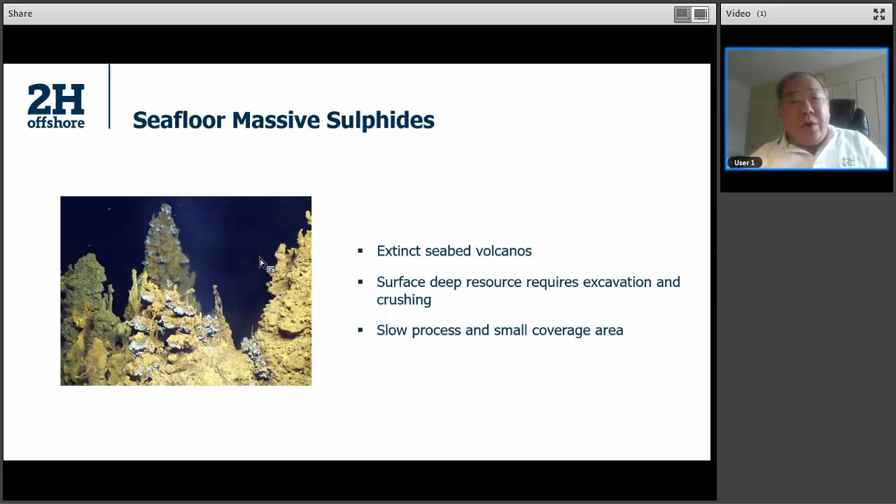Right, where are these resources? They're all over the world if you care to look. Some in exclusive economic zones, EEZ. These are the areas 200 nautical miles from shore where a country has exclusive rights for exploiting the resources. But the majority is in international waters outside the exclusive economic zones, because nearly 2/3 of the world is covered in ocean, and only a very small part of it is close to shore. The rest is in international waters.

Now, there's an organization called the International Seabed Authority, ISA. It's a United Nations organization that is headquartered in Jamaica. It regulates and manages the mineral resources in the international waters.

So I want to briefly talk about examples of resources in EEZ. And this is quite a well-known example in Papua New Guinea. What they are mining are SMS, the extinct volcanoes. The first commercial attempt of deep sea mining by Nautilus Minerals, a Canadian company, but they're based in Brisbane, Australia. But the project is now suspended because of lack of investments, running out of funds to get to the

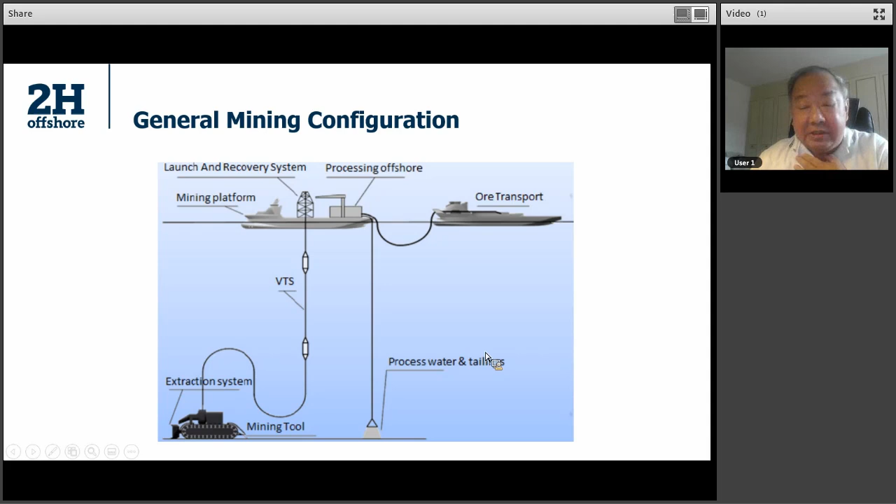Okay, I will talk briefly about each major component. First one is the production vessel. This is the Nautilus example. It's got quite a number of A-frames, you can see here, and a tower for deploying the riser. The A-frames are to deploy the miners, the crawlers, to the seabed.

Now, the number one challenge of the production vessel is dewatering of the slurry. The slurry typically consists of 85 to 90% water, 10 to 15% solid ore. So it's a lot of water. And this is water from the seabed, which is colder and has a different chemical composition, and you can't just dump it overboard, as I said. So you need wastewater disposal, to get rid of it safely, cleanly. And you have to store the dewatered ore, which is still moist, and then transfer this ore to the vessel that goes back to shore.

Now, the vessel designer tells me that when the ore is wet and stored, digging it back up to transfer to the transport vessel is as challenging as bringing it up from the seabed, because when it consolidates, it's difficult to dig back up. And the easiest way to transfer something is to have it mixed with water, because solids don't flow easily. Now you've just got rid of the water, and you've got to put the water back. It's a bit of a contradiction, so it's a bit of a headache.

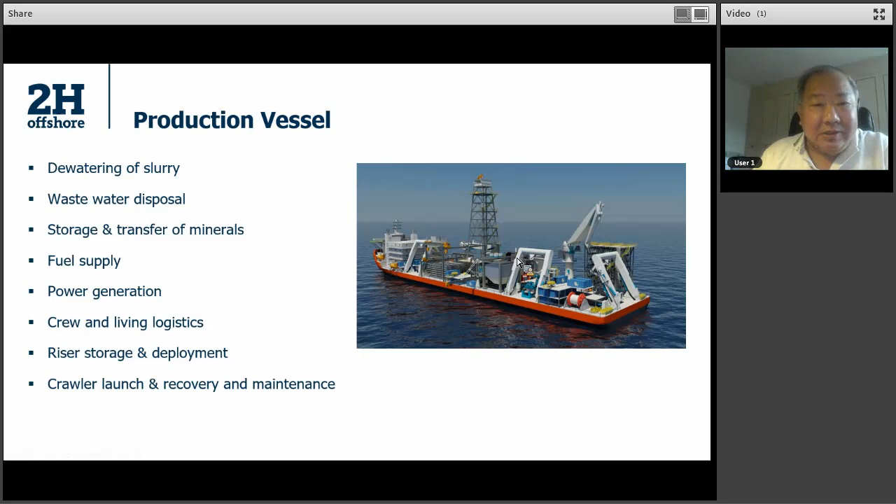Crawler. The crawler technology is adapted from seabed dredging and trenching. This is an example of the Nautilus crawlers, the three of them, because in Nautilus they are mining SMS, the seabed volcano. It needs a lot of digging and crushing and sorting out before the ore is mixed with water to send up the riser.

And now being so deep, Nautilus is about 1,500 to 2,000 meter water depth, and it has very high external hydrostatic pressure, which the components of this crawler have to withstand. They have to be launched and recovered for maintenance at quite regular intervals, and they have to move around the seabed in a pattern very efficiently, leaving no stone unturned, so to speak, to get the most out of the seabed.

Power consumption, as you can see, is massive and will require a lot of power to keep it going. Maintenance: every few weeks or less, you will have to bring each of them up, making sure that the parts are still functioning efficiently.

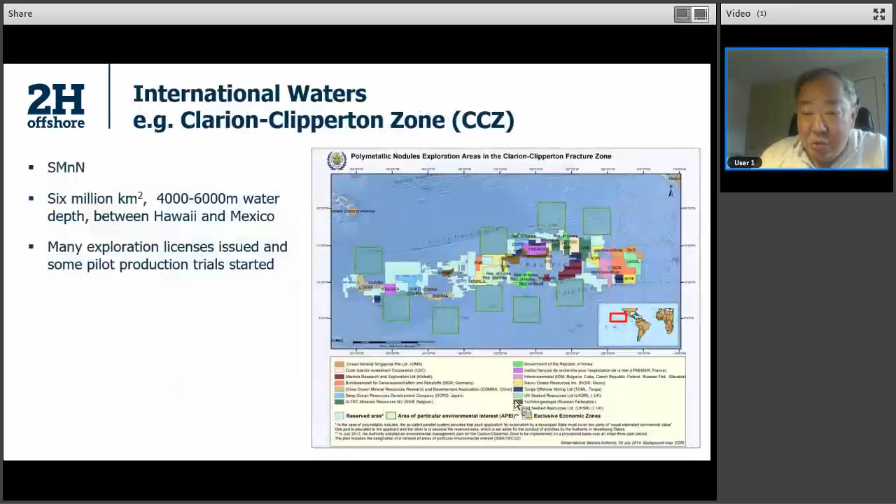Cable umbilical management. You can see in the last picture that the crawlers are all working simultaneously. One digging, one sorting, and then one crushing to get it up the risers. So the cables that are used to deploy them have to be managed so that they don't get entangled.

Then traction on the soft seabed. You need to be heavy enough to track, not light enough to skate along. So there's a bit of a fine balance between how heavy these machines can be.

Minimize plume generation. This is a very environmental concern. When you're digging, it generates plumes that get washed by the seabed current to far distances away. So there is a lot of research now going on in trying to minimize plume generation, to suppress the plume at source, so as not to let the plume go too far away. And then there's of course synchronization of vessel and crawler movements. The vessel may have to move along.

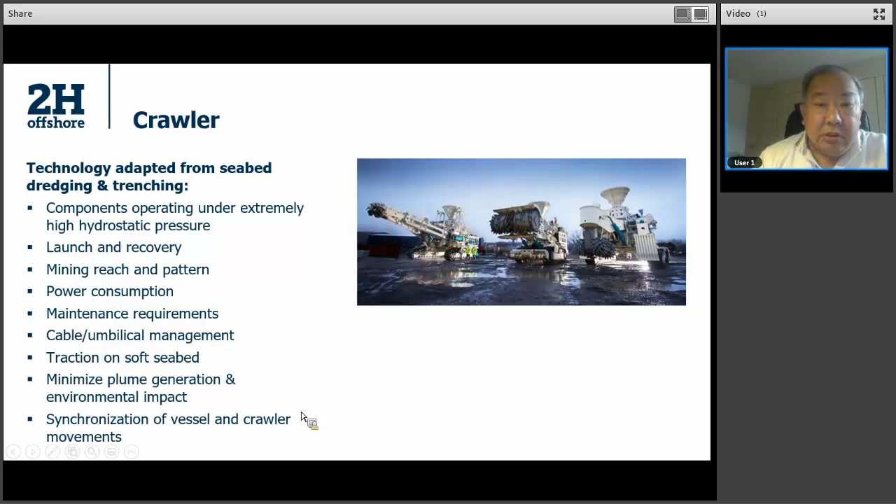Then we come to the vertical transport system, which is my subject really. The technology is derived from seabed dredging and oil and gas drilling industries. So this is a generic layout: mining vessel, a tower, and then a riser hanging, and jumper, and a crawler. And here what you see is not just a pipe, but also an umbilical that powers the pump. So there's pump, riser pipe string, and the jumper hose. And I'll describe them in turn.

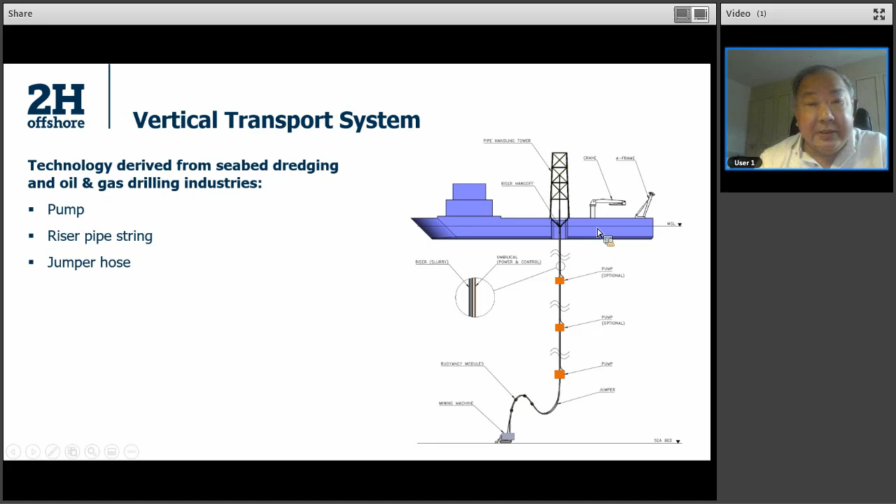Pump. This picture here is courtesy of GE, previously Hydril. They had a pump design for deep sea drilling, and it was converted for seabed mining, because in drilling it was handling drilling mud. Here it is dealing with slurry from the miners. It consists of these chambers. These are bladders that collapse and expand and work like a piston, to squeeze the flow from one chamber to another, and then out from the last one into the riser.

So this pump hangs directly below the riser and hovers over the seabed. As a positive displacement pump, it can create a very high pressure difference. One pump with 10 chambers is able to pump the slurry up around 2,000 meters of riser to the surface. But the flow rate is low, and because it's a piston effect, it's a pulsating flow, and we require multiple chambers, as in this case, and tuning to smooth out the pulsations.

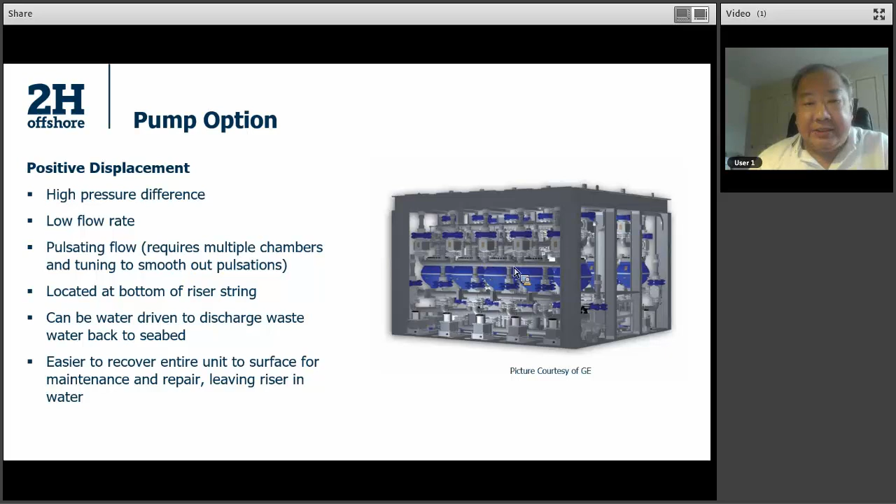The other alternative to positive displacement pumps is centrifugal pumps. Here, it's courtesy of IHC. Here, what you see is a pump station with two centrifugal pumps in it. So you need several of these centrifugal pumps in a riser string to relay the slurry from the seabed to the surface. It is because the centrifugal pumps create a relatively low pressure difference. So you need many of these to give you the total pressure required to overcome the hydrostatic heads.

The good thing is that the flow rate is very high. It's a continuous flow because it's centrifugal rotation, and it's located at multiple locations. In the study we did to pump manganese nodules in 5,000 meter water depth, we need 6 pump stations, 6 of these things. To avoid retrieving the risers each time you need to maintain the pumps, we would suggest that you could do some mid-water maintenance and repair. But I was told that these pumps are very reliable and don't need very much maintenance, from their experience in dredging.

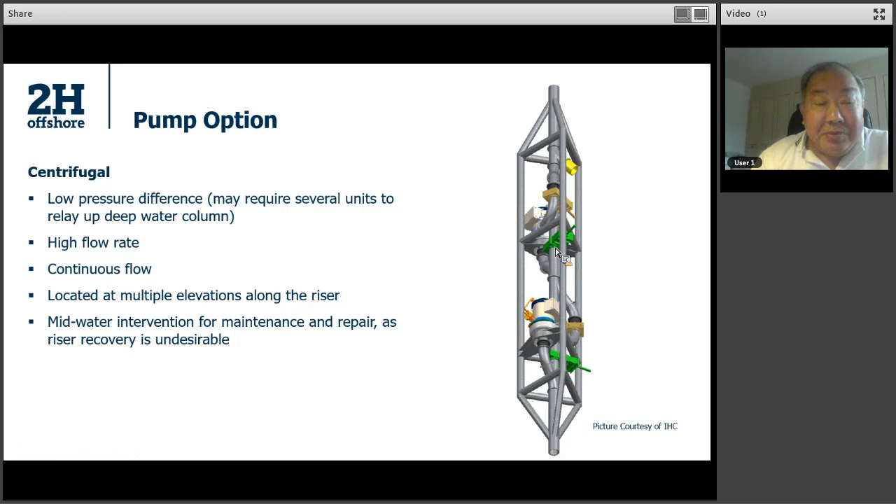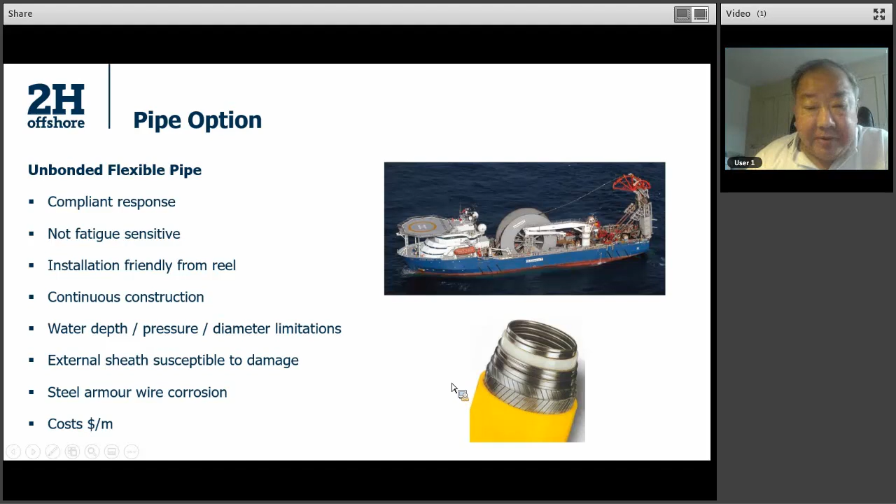The issue with this is it's got a sheath that is quite susceptible to mechanical damage, and once it's cut, seawater gets into it and it can corrode the armor wire, making it lose its tension capacity and fatigue. And it's quite expensive. Flexible pipe is very expensive and quite heavy too.

Another option is thermoplastic composite pipe. Again, it can be reeled, but you require a larger diameter drum than the flexible pipe option you saw earlier. It's stiffer than the flexible pipe. Also a good thing is it's non-fatigue sensitive. You need a larger reel because of the stiffer pipe. At the moment, there's a severe diameter limitation: 8-inch maximum, that's what the TCP pipe manufacturers are doing. There are 2 TCP suppliers. To convince them to do larger diameter, they will have to have a good business case.

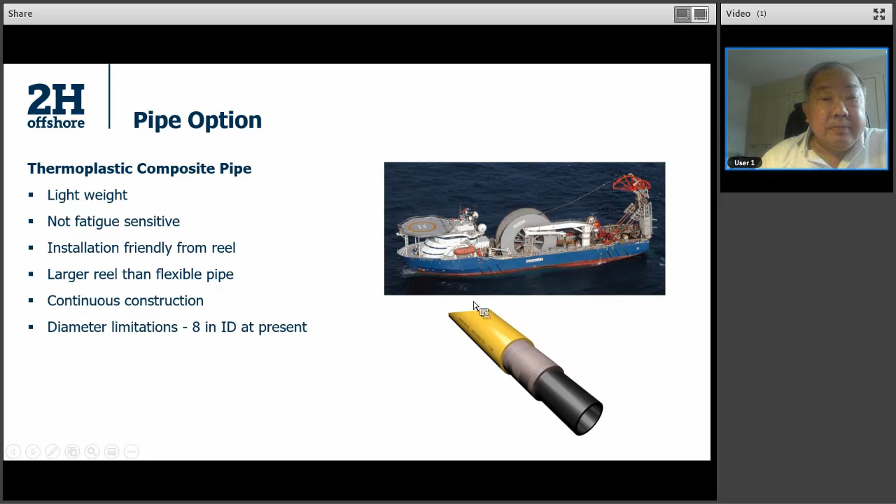And then we have bonded hose. This is built in short sections and connected together with a big flange like here. The problem is that they lack tensile strength, and there's a pressure limitation too. The end fitting is quite weak, but it's suitable for short jumpers, like the curvy jumper that you see connecting from the bottom of the riser string to the crawler. In fact, that is what would be used for Nautilus.

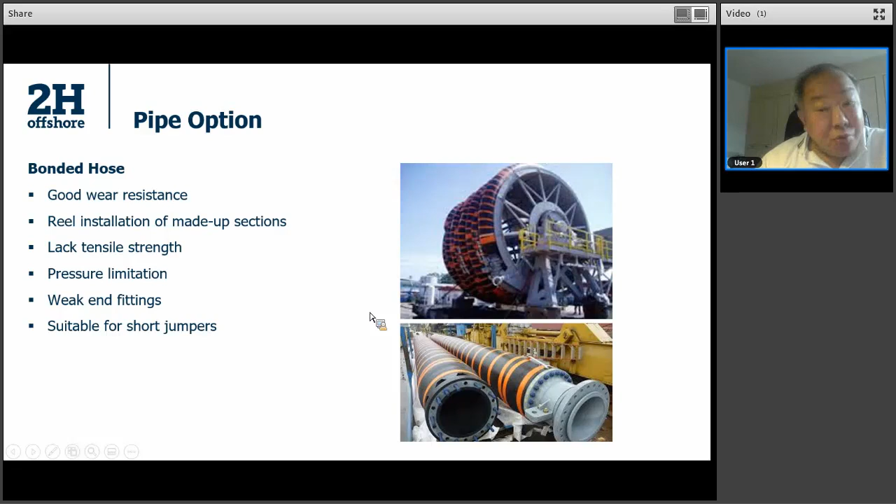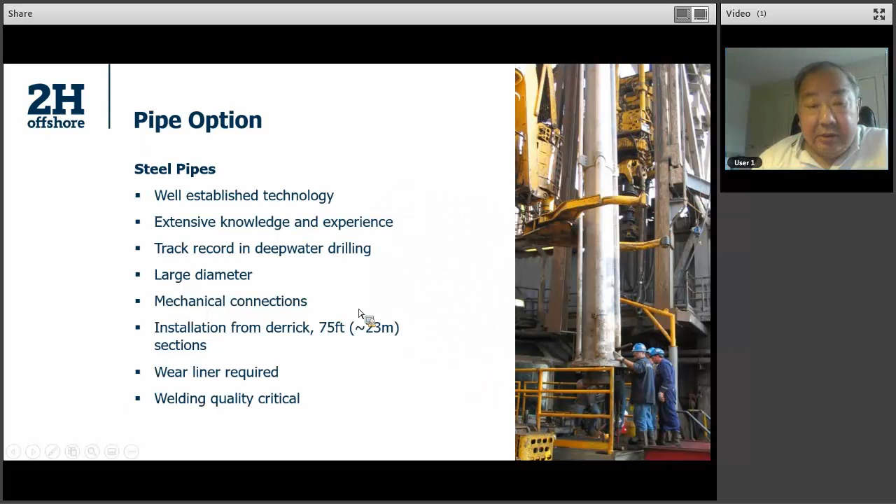Then we come back to the old-fashioned steel pipes. This is very well established technology, with extensive knowledge and experience, and a good track record in deep water drilling. We can do large diameters. A drilling riser is typically 21-inch, a lot more than the typical 14-inch that we need for mining. You require mechanical connections and installation from a derrick. They are about 75 foot long, 23 meter sections each. Steel gets worn out by the flow of slurry up the wall, so you need a wear liner, and welding quality is critical in order to have good fatigue resistance.

Deep water challenge: we're talking about 2,000, 4,000, 5,000 meter water depth. Most drilling facilities are designed for 3,000 meters, so for mining we are going even deeper. So there's a high riser payload, because when you hang it, the vessel has to support the riser weight. You need large deck space for storing riser components, and a long time to deploy and retrieve the riser. And with very deep water, the ocean conditions are uncertain. You would see current going in different directions along the way down, and it's quite unpredictable.

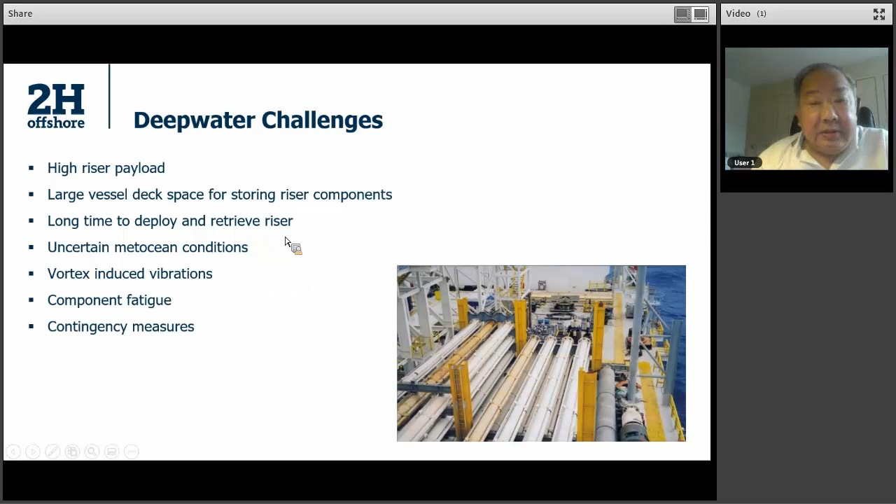I'll talk about VIV, vortex-induced vibration, later. That causes component fatigue, and you need contingency measures for such deep water application. VIV, vortex-induced vibration, as you can see, is vortices forming alternately behind a cylindrical body in a current flow. The alternating vortices can generate vibration in the pipe, quite high frequency stress reversal that can eventually fatigue the riser if you don't manage it properly.

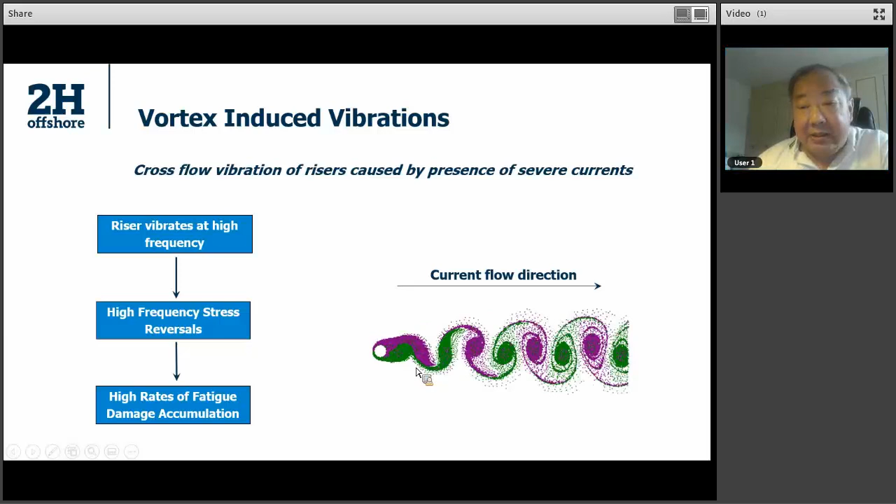We could mitigate VIV fatigue. It's not just the current. When you move the vessel, carrying the riser with it, the vessel towing speed is in itself a flow speed. You have to move slowly in order not to generate too much VIV, but that can mean not meeting the production target and not covering a large enough area.

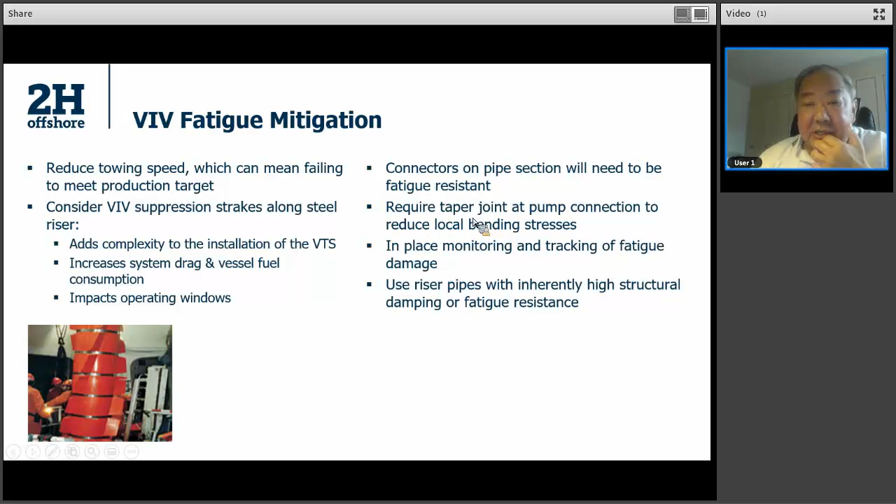So you could consider suppression strakes like shown in the picture here, but generally we would like to discourage it because it's complex, quite difficult to install, and increases system drag and vessel fuel consumption. And connectors all need to be fatigue resistant, and you need a special joint at the pump connection to reduce local bending stresses.

We could introduce in-place monitoring and tracking of fatigue damage to know how much damage is actually accumulated, and we could swap them around and try to avoid damage in that way. Or we use riser pipe with high structural damping or fatigue resistance, like flexible or TCP.

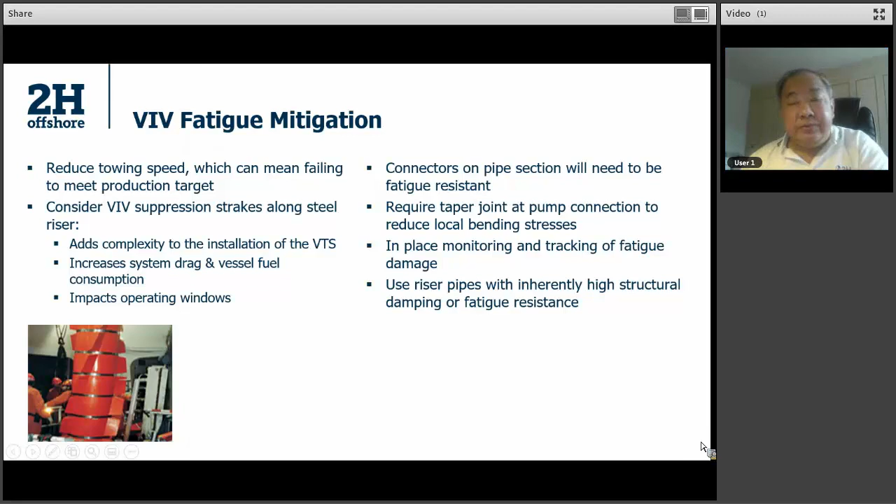Special issue for ultra deep waters. Because the riser pipe is slender, in a very long string it becomes a very soft spring with a mass like the pump hanging below it, and then you've got waves popping the vessel up and down, generating axial excitation. When the spring stiffness gives you an axial natural frequency close to the wave frequency, you can have an axial resonance problem.

When the riser is mining at a known water depth, you could put in a damper and a system to reduce the resonance. But during deployment, the length of the riser is increasing, and you're bound to come across a length that gives you the natural period of the waves. In fact, it's more hazardous during deployment than when it's in place mining.

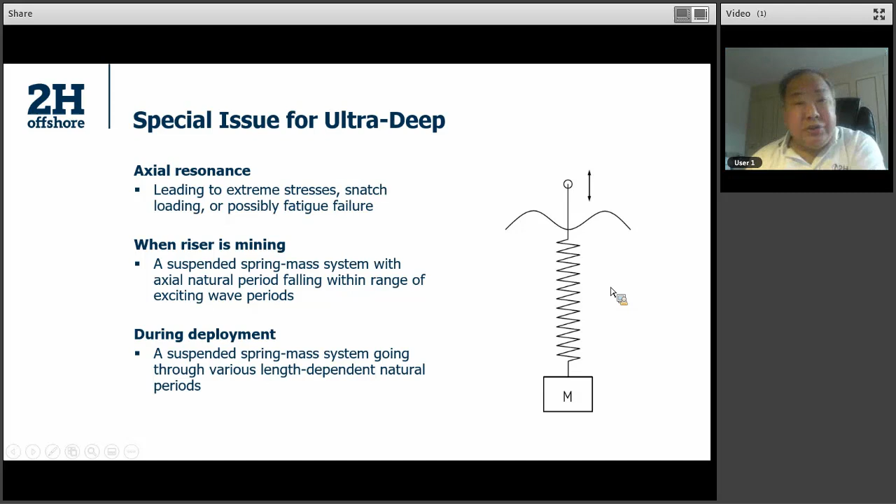Conclusions. Deep sea mining technological challenges are formidable. I only touched on the surface in the previous slides. We need to learn from trials, step by step. And trials don't need to be successful. It is sometimes the mistakes or the unsuccessful trials that allow us to learn the most. So we should do trials from 50 meters, 200 meters, 1,000 meters before we get to 5,000 meter water depth. Let's not jump the gun.

And the VTS, the vertical transport system, raises the biggest concern, because we are toying between flexible TCP, lightweight, and steel, and steel pipe is very heavy. You need a big deployment facility, and it's got fatigue problems. So we'd all like to use a lighter riser, but it's not there yet because we don't have the diameter. We haven't come out with the best solution, so to speak.